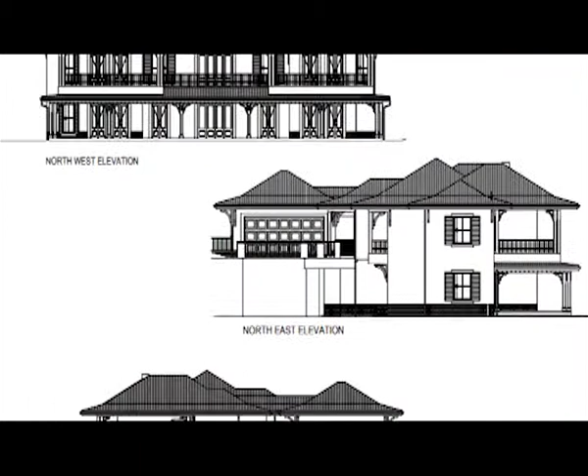The stages that follow thereafter: the owner is now almost getting ready to build. The first thing is to get the plan approved by the relevant local authority. For example, if it's City of Harare, you take your plan to City of Harare for submission to your local authority offices. It will then be examined to make sure everything is in order and in line with bylaws.

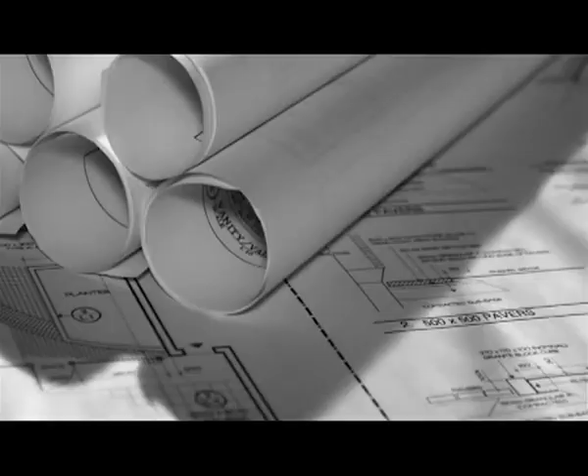Once approved, you have an approved plan stamped by the local authority, which normally gives you a time frame within which to complete the project. Then, of course, you can go ahead and complete the project. But before completing it, once the plan is approved, it's important as the owner to have a full understanding of the materials that you need.

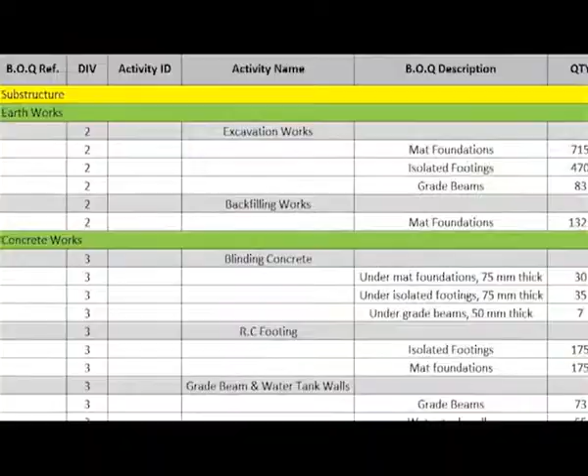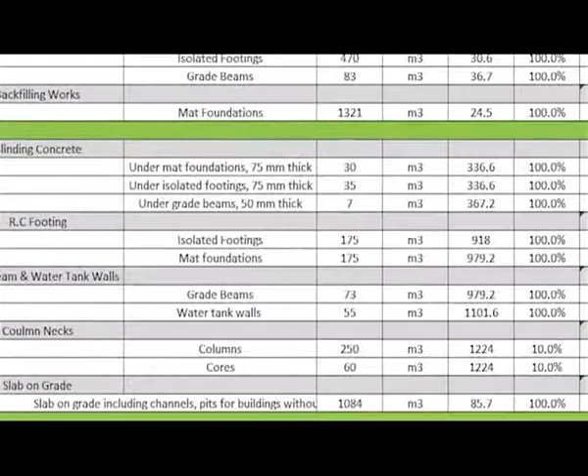Therefore, you need to get a bill of quantities done, which is done by a quantity surveyor. I recommend and emphasize the use of properly qualified quantity surveyors.

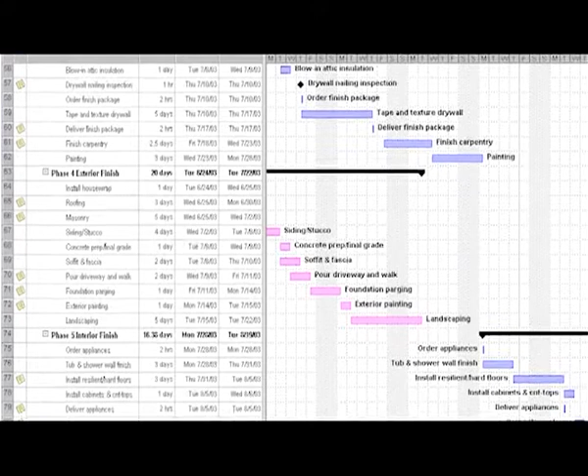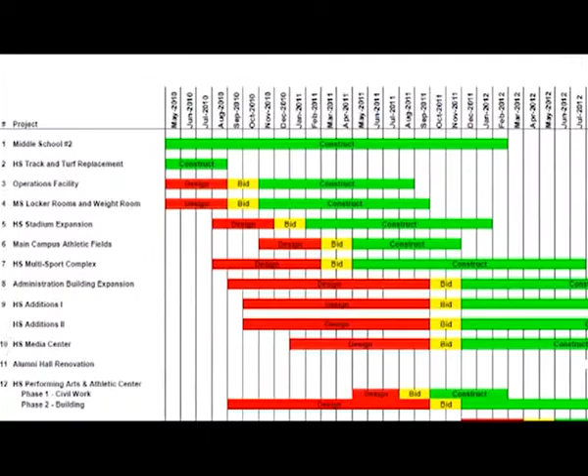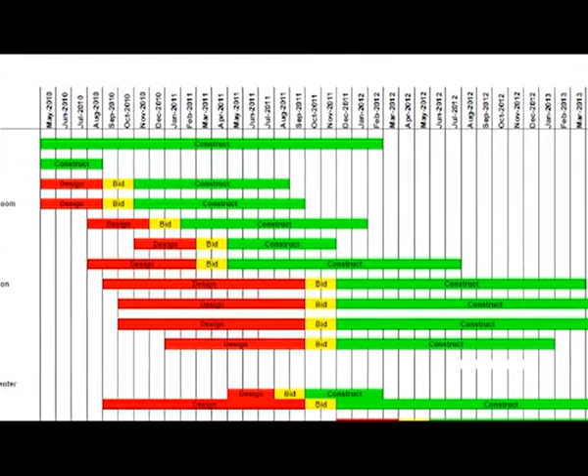What the bill of quantities basically does is give you two key points: the schedule of materials, what is needed to complete the house, usually broken down into stages. For example, you need to know how many bricks go into your project, how many bags of cement, how many roof tiles, how many air vents, just to name a few. Every piece of material that goes in is within the schedule of materials.

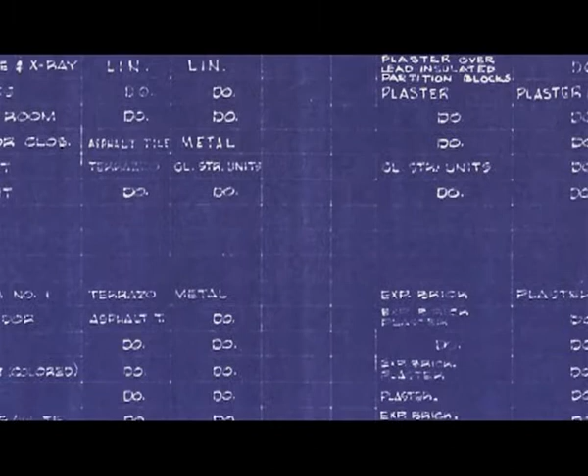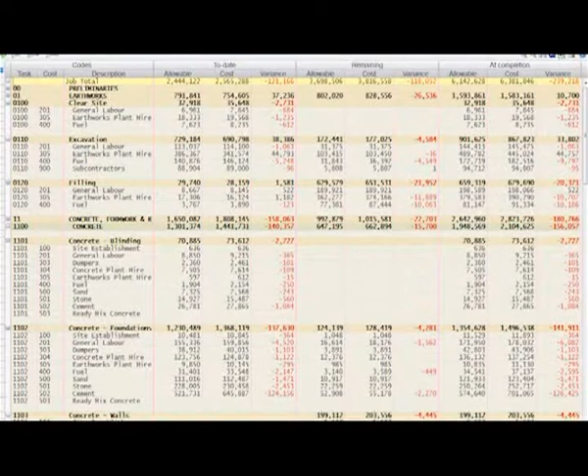Then with the schedule of materials, you can have the priced bill of quantities, where the materials are priced, so that you know what it's going to cost you in terms of purchasing materials, which can also be broken down stage by stage of construction.

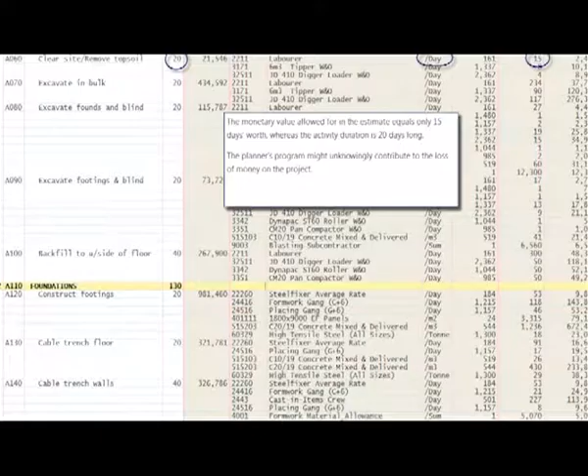And then labor is factored in, so you know what it is likely to cost you. This is before you negotiate with whoever you are going to utilize to do the construction for you. Once you know what is required and what it's going to cost, you will know exactly how to plan your finances. Secondly, it enables you to hold whoever is doing your work accountable, because you know that you can now track and trace your materials.

Otherwise, you are told we want 100 bags of cement, and after a week, you are told they are finished, and you never know whether they have really been used there or some could have been stolen, because there's a lot of that, unfortunately, going on. Unless you're an experienced person in construction who can say, no, I know how far it goes.

Secondly, sometimes materials may not be stolen, but the application of materials may just be done in such a manner that it's not cost effective.

Otherwise, there is no quality control. For example, there's a certain acceptable level for plastering thickness. If your builders plaster 1.5 times more than the acceptable level, it means more sand, more water, more cement, and more labor. So it's going to cost you more, and you can't really know where the materials are going. But with a bill of quantity and correct inspection, you are able to arrest those potential leakages either through pilferage or through inappropriate, inefficient application of construction materials.

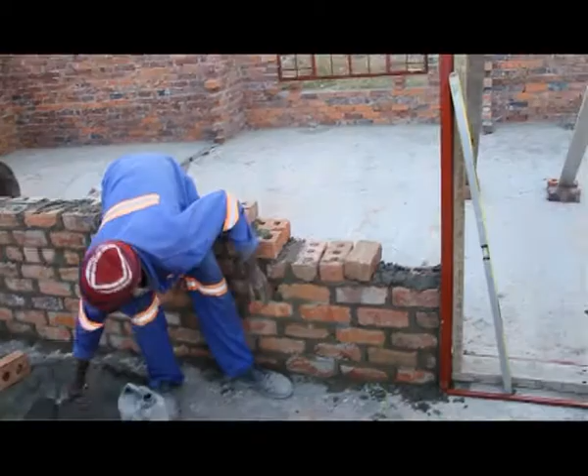Subject to the size of the project, there are certain projects that, because of their size being big, I would advise you where you can actually do a credit check and ask to see the projects that have been undertaken in the past. If it's a smaller project, you can identify individual builders or small contractors that you can use.

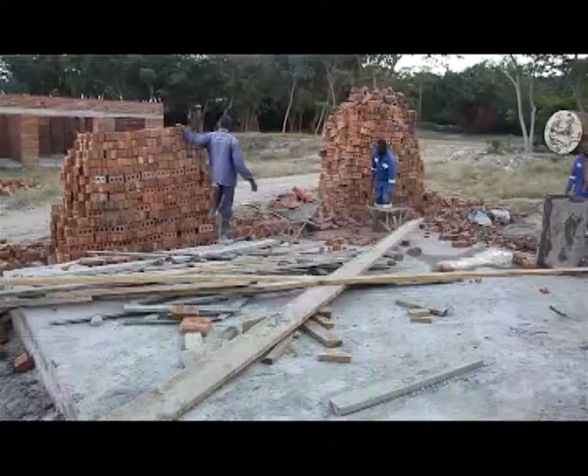Again, it's important that you really check on the credit worthiness of the contractor you are picking. If it's an individual person, it's important to establish that indeed they are a builder, because a lot of people claim to be builders and yet they are not. Ask for their cards that show qualification.

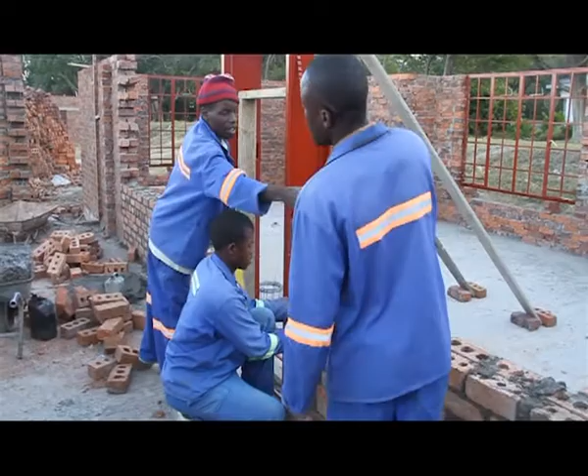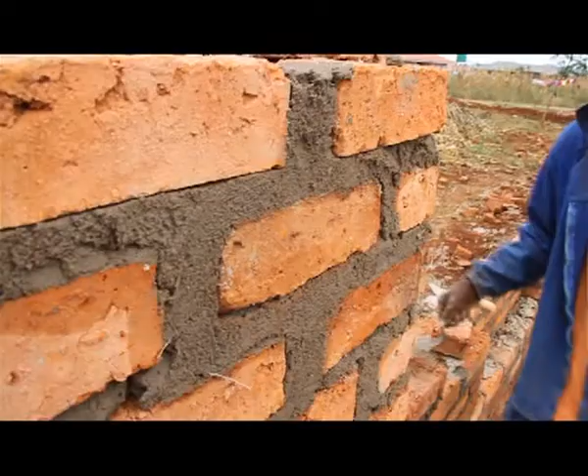What grade are they? Is it grade 1, grade 2, grade 3, grade 4? If it's a grade 4 guy who is probably just qualified and he says, 'No, I'm able to peg the house and build for you,' you may be in for a storm and a big surprise, because he may not even know how to peg. He can show you a house that he was involved in as an assistant builder, and claim that he built it. So it's important to speak with the actual owners of the houses he says he has built, and just verify that the information you are getting is indeed correct.

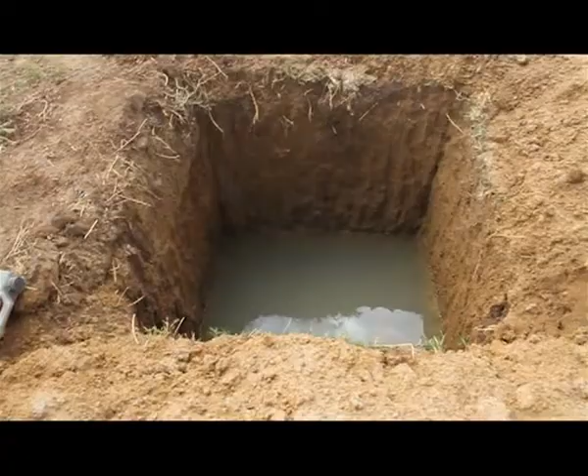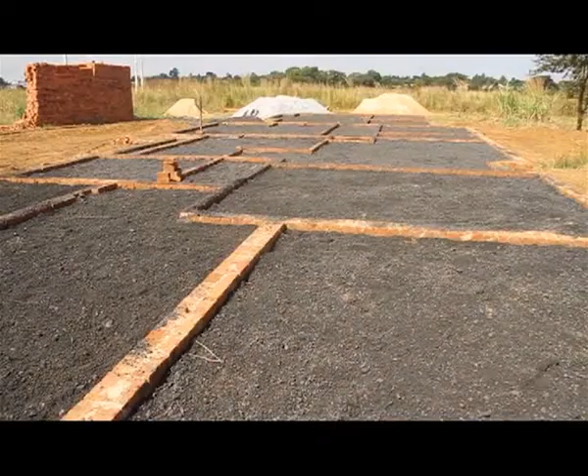Well, the next stage is to get the guys on site and let them do the work, stage by stage. It's important to focus on stage by stage, in the sense that you don't want to run out of money in the middle of a stage. For example, let's suppose you've got funds to build up to maybe window level. It may be appropriate for you to allocate resources to build up to slab level, complete everything, and stop.

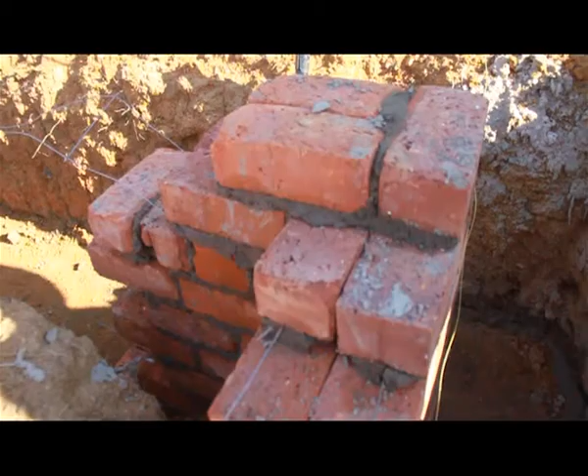And gather enough resources to move from brickwork at slab level straight to wall plate level. Wall plate level means the whole brickwork structure on the property is done. You are now ready to put your trusses and proceed with the project. Whatever it is, residential, industrial or commercial, that's basically what it would mean. So the stage planning is critical, because it enables you to see how the progress is going through.

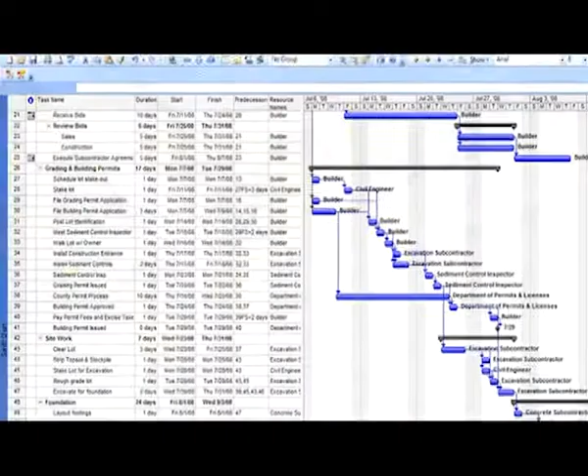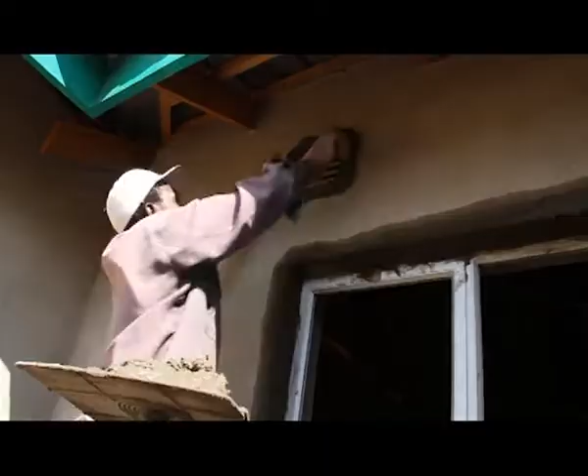It's important that you plan for a schedule of activities, meaning what activities are going to be running from day one, and which activities are going to be running concurrently. For example, I'll start with the foundations. You are now putting in your slab. Your electricians will need to come in and put in their conduiting in the slab for plugs. Your plumbers will need to come in and put in their plumbing for the WC, shower, traps and that kind of stuff. Otherwise, you find people doing the slab and finishing, and then realize the electrician was not there to do what they were supposed to do.

Because once that part is coordinated well, you find that your project flows smoothly, and it is important to get hold of that. Otherwise, happy building, let's continue building. Remember, invest in a property, you invest in your future. It's a generational asset, and we need to build and build well. Quality is a must, and we can't live any other way. Thank you.